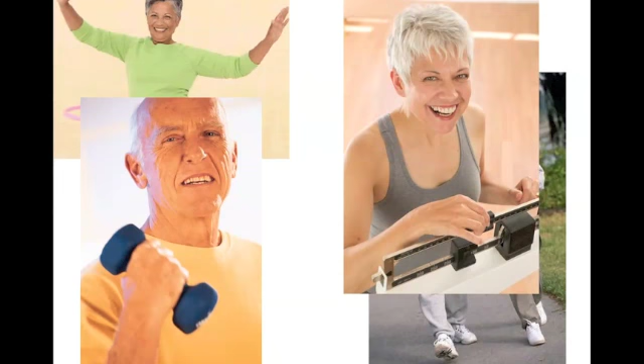One goal of this study is to examine individual differences in ability and the factors that account for those differences. I am now going to examine your ability to process verbal information. In an effort to reduce potential biases, we'll be using a task that has been shown to be appropriate for individuals of all ages. Interestingly, older adults have been shown to do quite well on this task.

Cars are by far the most popular form of transportation in the United States. The majority of cars on the road today utilize a four-stroke internal combustion engine to create power. The following presentation will briefly describe the basics of how a four-stroke engine works.

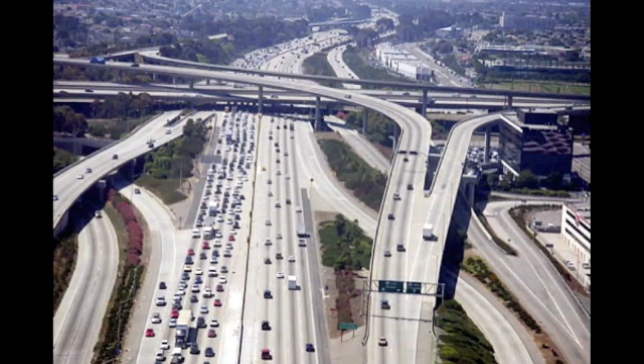At the heart of an internal combustion engine lies the cylinder, which is essentially a hollow tube. We will begin by briefly describing each piece of the cylinder, followed by an explanation of how all the pieces work together. Inside of the cylinder is a piston, which is free to move down and up.

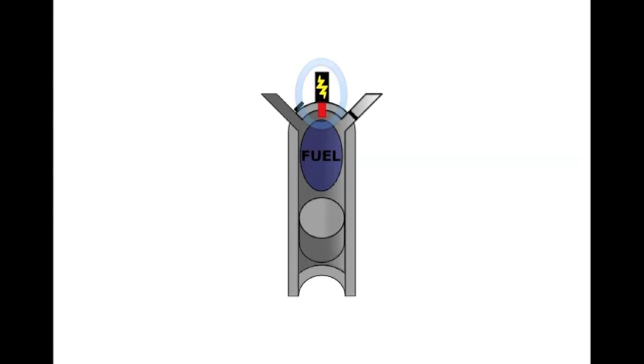At the top of the cylinder, there are two valves. The first is the fuel valve. When the fuel valve is open, fuel is able to flow into the cylinder. The next piece of the cylinder is the spark plug. When the fuel is prepared, the spark plug emits a spark, igniting the fuel.

The final piece of the cylinder is the exhaust valve. Once the fuel has been burnt, the exhaust valve opens. This allows the exhaust to be pushed out of the cylinder.

The cylinder creates energy using a repeating pattern of 4 strokes. In the first stroke, known as the intake stroke, the fuel valve opens. The piston moves down, reducing the air pressure within the cylinder. Atmospheric pressure from outside forces a mixture of fuel and air into the cylinder.

In the second stroke, known as the compression stroke, both the fuel valve and exhaust valve are closed. The piston moves up, compressing the mixture of fuel and air so that it burns more efficiently. In the third stroke, the spark plug emits a spark. This ignites the fuel, which expands as it burns, forcing the piston back down.

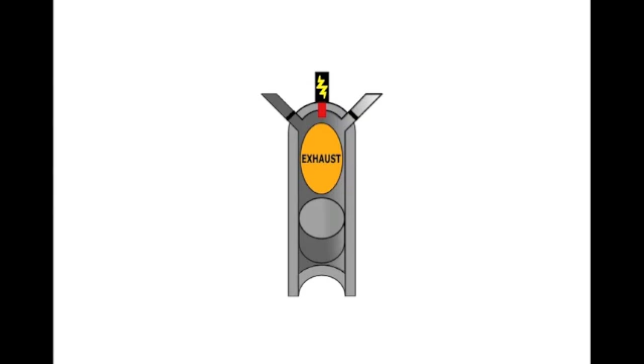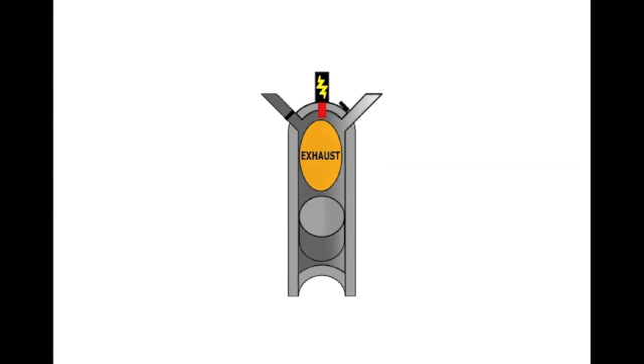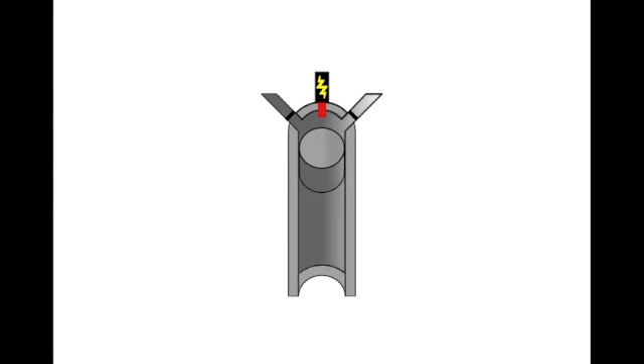This stroke is known as the power stroke because it creates the power which spins the wheels of the car, as well as the power to move the piston through the other 3 strokes. In the fourth stroke, the exhaust valve opens. The piston moves up, pushing the exhaust out of the cylinder. The process then repeats.